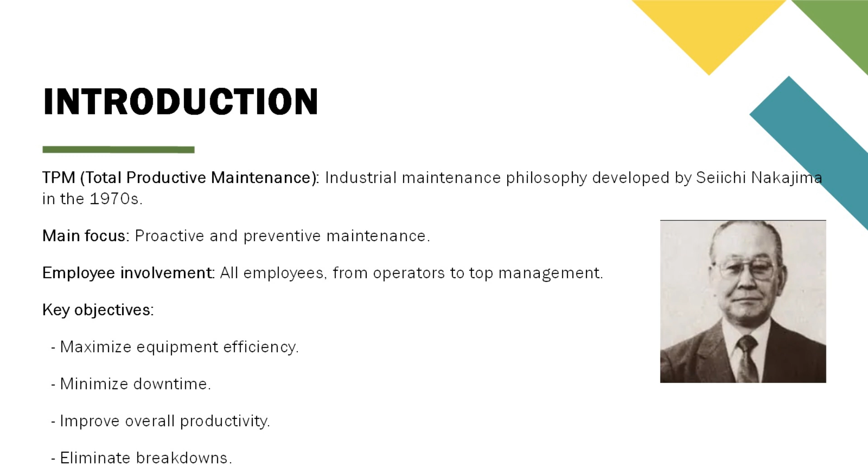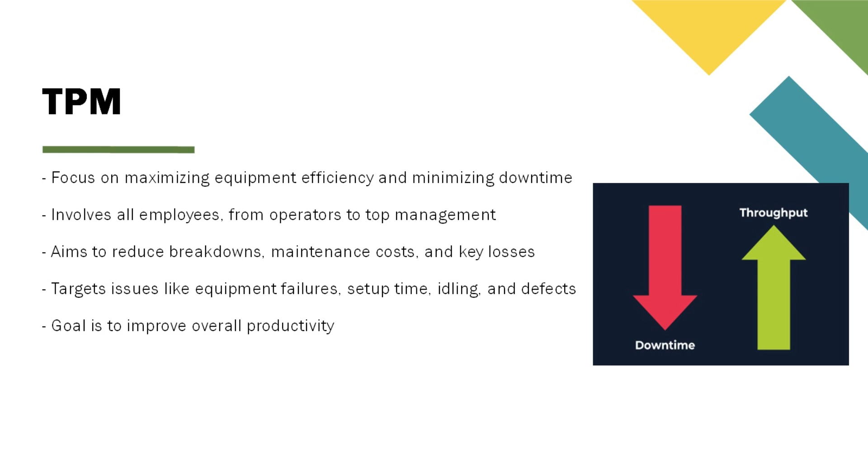Total Productive Maintenance, TPM, developed by Seiichi Nakajima in the 1970s, is a management philosophy focused on maximizing equipment efficiency and minimizing downtime. It involves all employees and aims to reduce breakdowns, maintenance costs, and key losses like equipment failures and defects, improving overall productivity. Total Productive Maintenance was created to reduce production system costs.

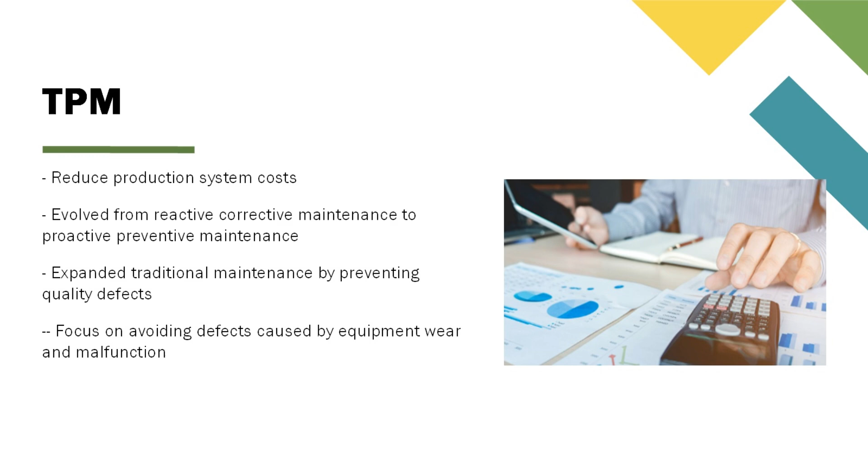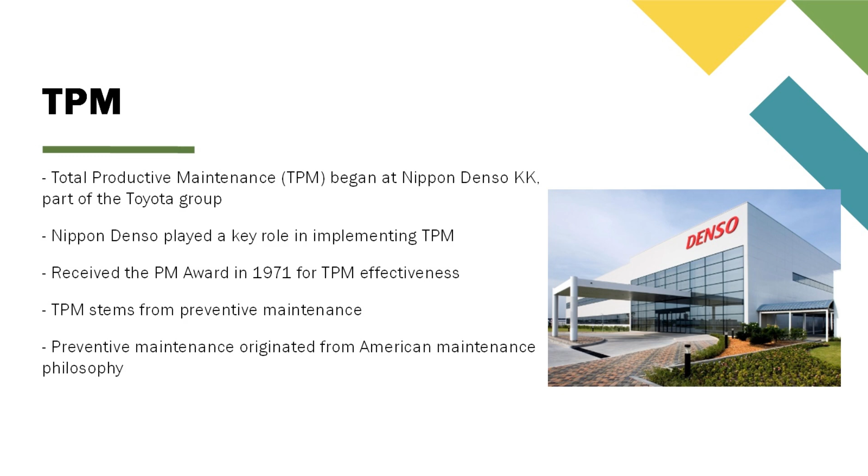Originating in Japan, it represents the evolution from reactive corrective maintenance to proactive preventive maintenance. TPM expanded traditional maintenance concepts by incorporating efforts to prevent quality defects caused by equipment wear and malfunction. Total Productive Maintenance began at Nippon Denso KK, a member of the Toyota Group, which played a key role in implementing this philosophy and received the PM Award in 1971 for its effectiveness in the TPM program. TPM also stems from preventive maintenance, which originated from American maintenance philosophy.

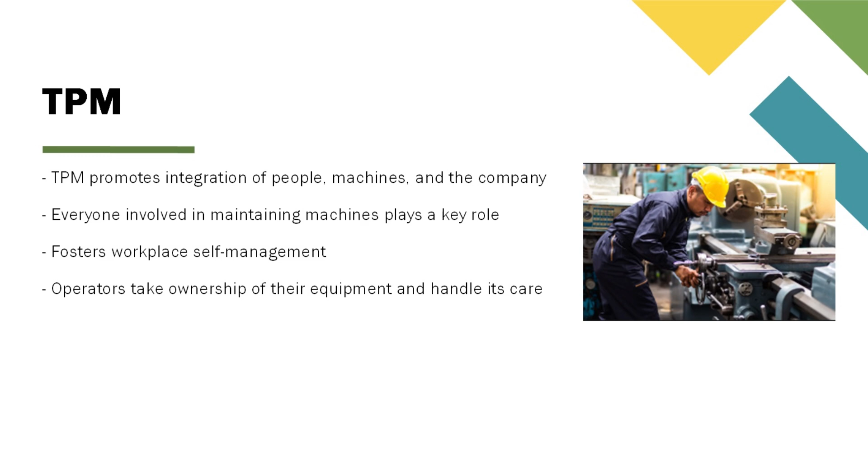TPM can be considered a philosophy, a collection of practices and techniques aimed at maximizing the efficiency of equipment and processes used by a company. It encompasses both equipment maintenance and aspects related to its installation and operation. TPM promotes the integration of people, machines, and the company, where everyone involved in maintaining the machines plays a key role. It fosters workplace self-management, as operators take ownership of their equipment and handle its care themselves.

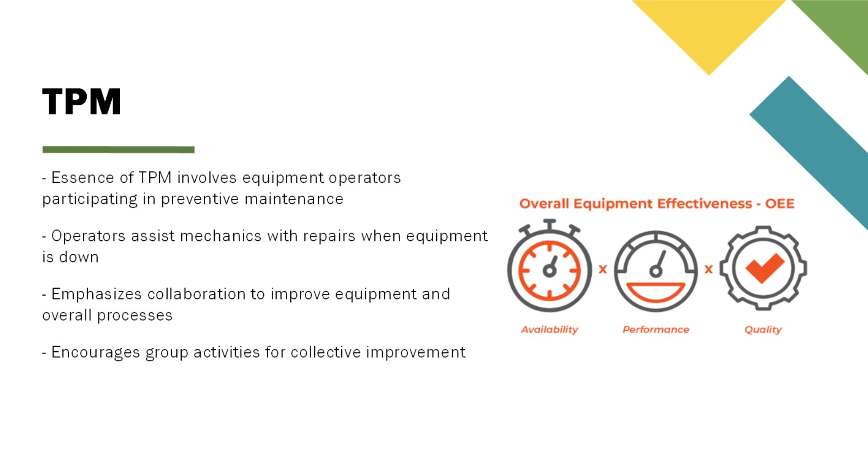The essence of TPM is that equipment operators participate in preventive maintenance efforts, assist mechanics with repairs when equipment is down, and work together to improve both the equipment and the overall process through group activities. TPM, using the Zero Defects Quality Control Circle, expanded the maintenance context by requiring each employee to exercise self-control over their machinery, the concept of protecting machines, the integration of company, people, and machines, and the idea that maintenance should be everyone's responsibility within the organization.

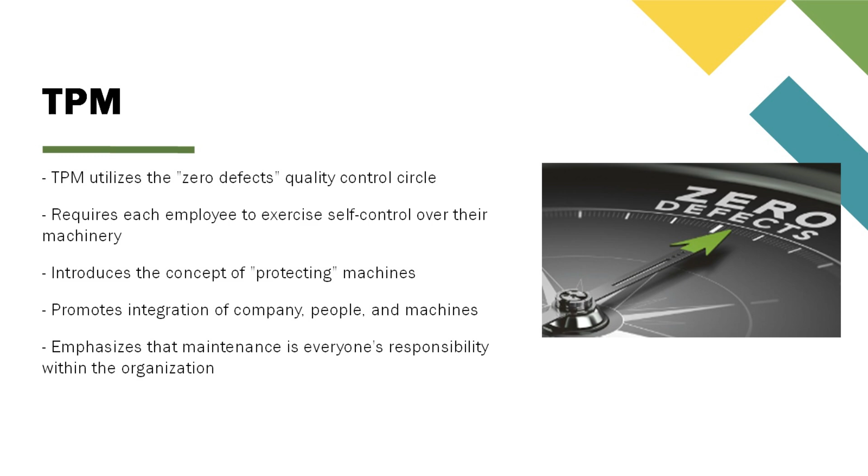Key elements for implementing TPM include cultural change, aiming to optimize overall equipment performance; a loss prevention system, establishing goals for zero accidents, zero quality defects, and zero breakdowns; cross-departmental involvement, engaging all departments, including maintenance, production, engineering, and HR; continuous improvement, Kaizen, involving all employees from top management to operators in improvement activities; and education and training, enhancing employee awareness and skills.

Improvements should empower employees to perform autonomous maintenance, enable technicians to intervene effectively, and allow engineers to design maintenance-friendly equipment. Additionally, focusing on effective equipment quality involves increasing equipment efficiency and assessing the life cycle cost, LCC, for new equipment. The goal is to reserve complex maintenance tasks for specialists while encouraging operators to handle minor maintenance activities.

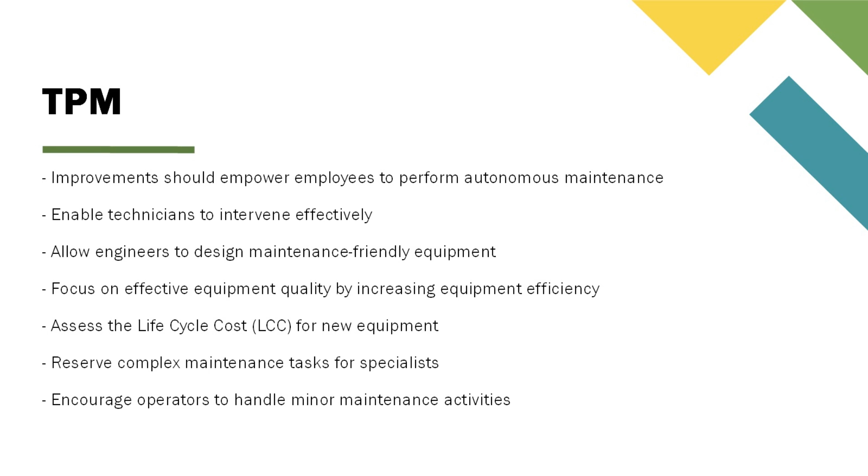Machines and equipment are constantly subject to losses. Therefore, it is important to identify, measure, mitigate, and eliminate these losses whenever possible. In TPM, there are 6 major losses. 1. Breakdown losses due to equipment failures. 2. Setup and adjustment losses during changeovers. 3. Small stop losses resulting from minor stoppages. 4. Reduced speed losses caused by decreased production speed. 5. Quality defect losses due to defects and rework. 6. Yield losses related to reduced overall efficiency.

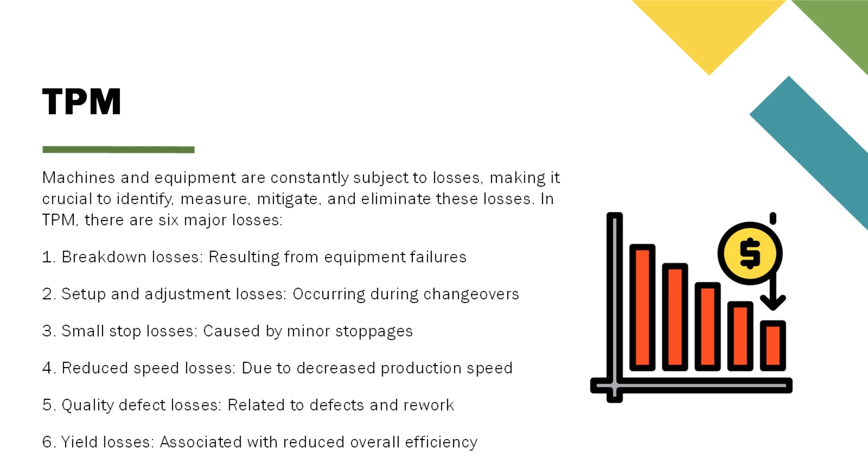Zero breakdowns refers to equipment operating without failures or interruptions, as breakdowns are the main factor in reducing stability and operational efficiency. The concept of zero breakdowns does not imply that this ideal, potentially impossible or financially prohibitive, will be fully achieved. Instead, it emphasizes that everyone should work toward continuously minimizing failures and interruptions. Several actions can help combat operational interruptions caused by breakdowns and failures.

Pillars of TPM. In TPM, to eliminate the 6 major equipment losses, the following 8 activities are implemented, known as the 8 pillars of TPM development. Autonomous maintenance refers to maintenance performed by operators to ensure high productivity levels of equipment. Planned maintenance is the pillar responsible for the overall planning and control of maintenance at a macro level. Managed by the company's maintenance department, it is executed by specialized technicians. The goal is to increase overall equipment effectiveness, OEE, by improving operational availability.

Focused improvement is responsible for managing equipment performance data. This pillar generates statistics and proposes optimizations through improvement groups, aiming to eliminate losses. Education and training in TPM manage the knowledge control of operators, technicians, engineers, and managers involved in the process. Initial control refers to establishing a management system for the early stages of new projects and/or equipment. Quality maintenance aims to implement a zero defects program.

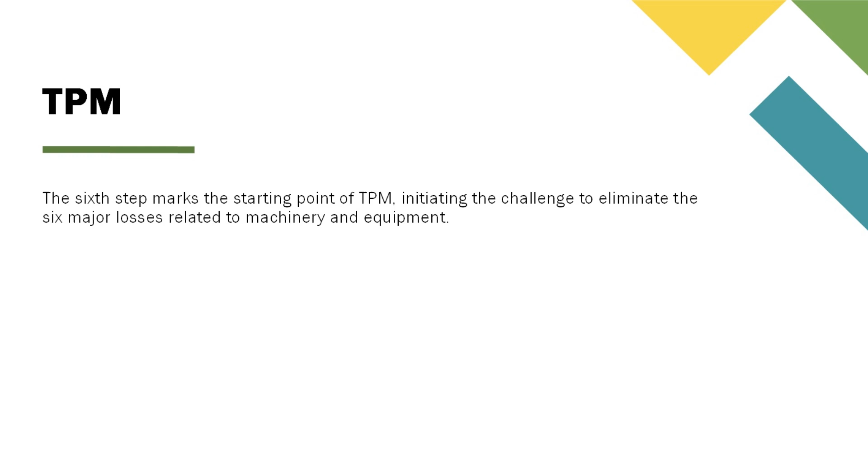The 6th step marks the starting point of TPM, initiating the challenge to eliminate the 6 major losses related to machinery and equipment. The 7th step involves structuring the pillars of TPM to ensure the reliability of the production system. The 8th step corresponds to initial control, where assessments of inconveniences and imperfections are conducted, along with the incorporation of improvements, even in new machines. This knowledge enables the development of projects that include maintenance prevention concepts aimed at achieving zero breakdowns or failures.

The 9th step focuses on maintaining quality. The 10th step involves implementing administrative TPM, which includes a review of administrative routines to eliminate losses and pursue continuous process improvement. The 11th step integrates safety, health, and environmental actions within the TPM framework. The 12th step entails the full application of TPM and the pursuit of continuous improvement.